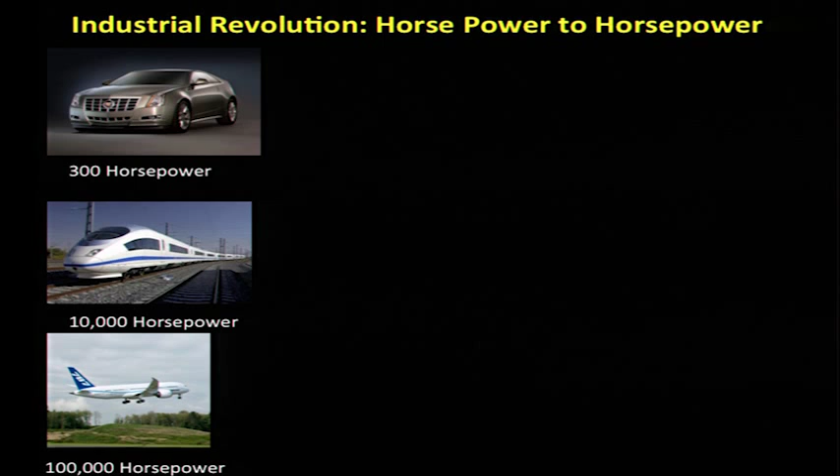And human history is about 10,000 odd years old, a little bit more. And in that 10,000 years, the last 250 years is when all of this happened. And we light our homes not by whale oil anymore, but by a grid. And if you look at this world today, I don't think Washington and Jefferson could have imagined this lifestyle that we have today. And so obviously this has changed the world in many ways.

It has increased our productivity. It has increased our prosperity. And that has been an exponential increase. And it's measured, in this case, by global per capita GDP. This is global now. And you could have multiple measures, but this is one. And that has increased exponentially, and so has our energy use. And if you look at this, almost all of it, 80% of this has been fossil energy.

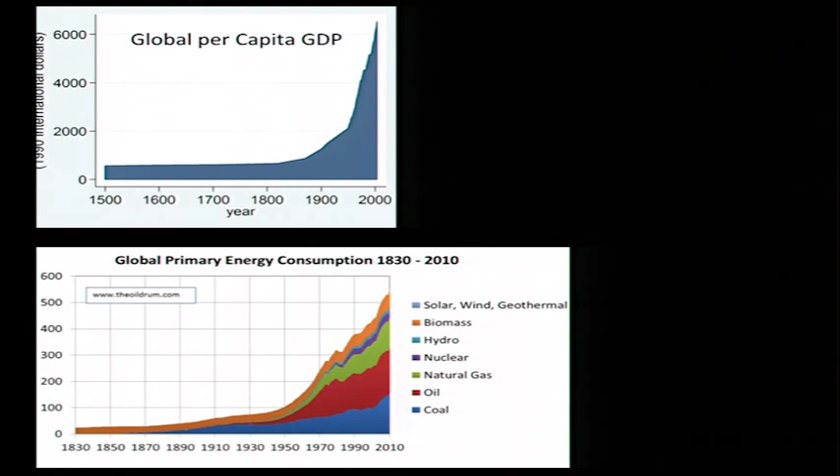And so the Industrial Revolution is all about energy. How we source energy, how we distribute energy, how we use energy. That's what it's been. There are a few other exponential increases that happen. The world population went from 700 million people in the beginning of the Industrial Revolution to 7 billion. So 10x. And that's a factor not just of the Industrial Revolution, but of things like the Haber-Bosch process that made artificial fertilizers that helped save the world from starvation and famine and grew food for all of us.

And so this is now the world that we live in. We have 7 billion people. By 2050, the estimates are 9 billion. And by 2100, 10 billion, plus minus an error bar. And that number really depends on the fertility of women in Africa. That's what it depends on. And so this is the world we're going to encounter in the future. Our children, grandchildren are going to encounter.

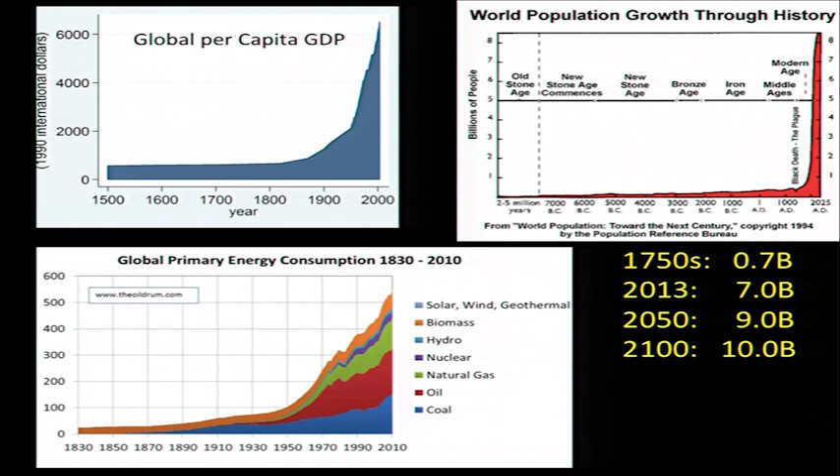And people talk about peak oil. There's really no peak. And that is because the technology for discovery and extraction gets better and better, gets cheaper, and it keeps pace. And in fact, not only keeps pace with the demand, it exceeds the demand. So sometimes you find the capacity is built out and the price comes down. But there seems to be enough fossil fuel out there. In fact, right now, we are all excited about US shale. We haven't even touched methane hydrates, and there's a lot more out there. So it's fair to say we have a lot of fossil fuels.

But if we are to extend this world, there are a few things we should be aware of that we are encountering today. And that is the global price of oil. One of the amusing things we had to encounter in Washington is that everyone blamed the president for the price of oil. The president does not control it. In fact, we had to put up a nice face in hearings and all that, saying that we're really sorry the price of oil is low. We had no control over it, neither did Congress. Neither does Congress.

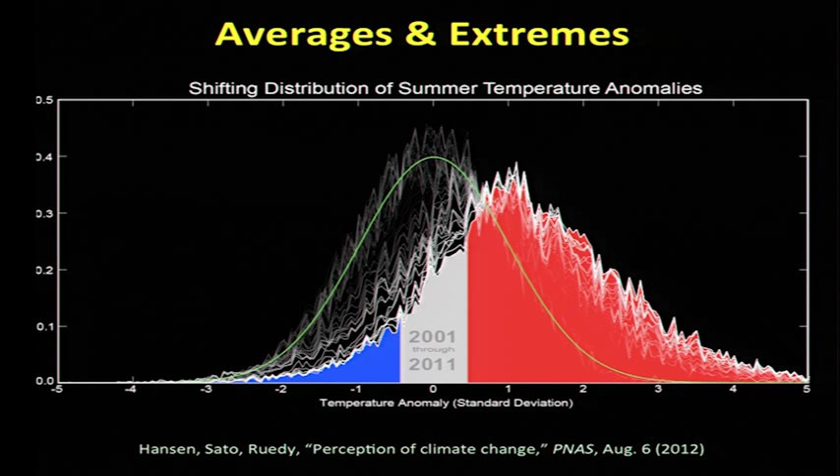But now I'm going to play the movie for you as to how this distribution, this is data now, of the 1960s and 70s. You can see this is fluctuating, but it's about the Gaussian, and see what happens. So clearly the average has moved, but that is just a small slice of the whole story, because what you're finding is that this distribution is broadened. There's clearly a direction for this distribution to move.

It is not moving on the other side, but the tails of the distribution, which have a nonlinear effect on our life, on our economy, are certainly there, and you're reaching 4 to 5 sigmas at probabilities that were unheard of in the past. And it is this tail which is really worrisome.

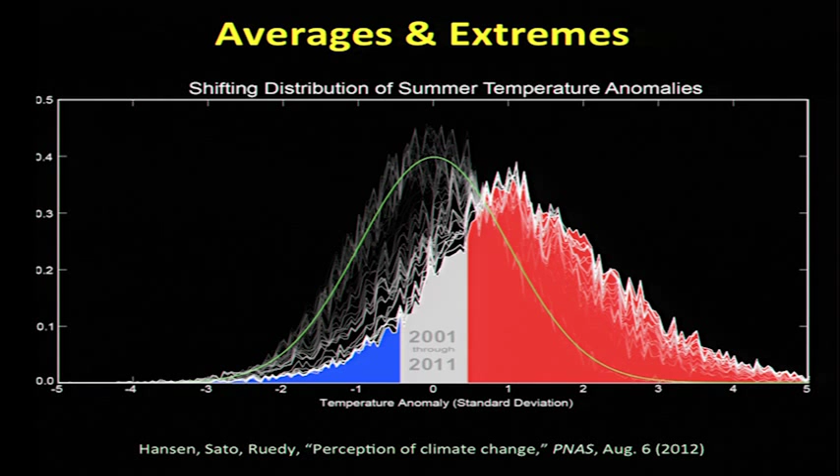So last summer you had a heat wave in the Midwest, which was almost as bad or worse in certain cases than the Dust Bowl of the 1930s, which led to a lot of folk music and all that, right? And last year, it really affected our agriculture and our livestock, et cetera. A few years ago, we had this heat wave in Moscow and Russia, which killed about 70,000 people. Before that, it was in Europe.

So if you really look at the geographical map, I'm not presenting it here, but there's a geographical map. And what you find is these heat waves, the hot spots, are moving around the world, just like a bubble in a carpet. We don't know where it's going to happen next. And so with climate change, there's a lot of science needed to figure out where it's going to happen next so we can plan for it. But certainly this is happening, and the hot spots are going around. So this is a real issue.

So now if you ask the questions, you've got economic security, you've got balance of payment, now you've got an environmental aspect of it.

So let's go back to the beginning of the Industrial Revolution and ask the question, how much CO2 have we emitted since the beginning of the Industrial Revolution, which has given this 0.8 degrees rise? So what's the cumulative CO2 emissions since the beginning of the Industrial Revolution? And this just came out in an IPCC report, and I'm going to put some rough numbers out there, approximate numbers. And it's about 1 trillion tons of CO2.

And the life of the CO2 molecule in the atmosphere is more than 100 years. In fact, most of the CO2 molecules are still there. Some of it is absorbed in the oceans. But nevertheless, it's still there. It's like a big capacitor, and it's integrating over time. So this is 1 trillion tons in 250 years.

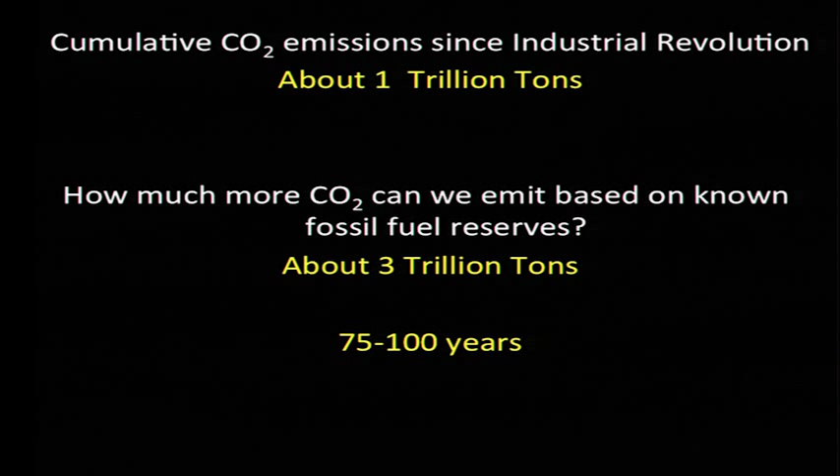And then you ask the question, these 3 trillion tons of CO2 in terms of fossil fuel, how much is it worth? What's the dollar value? And the number is tens of trillions of dollars. People are estimating $28, $30 trillion, but it's a huge number.

So society is given the choice. The choice is as follows. Should we keep those 30 trillion or tens of trillions of dollars in the ground and not use it for economic growth and save the environment? Or should we take those tens of trillions of dollars, continue on the exponential growth of our economy, and to hell with the environment? And that is the choice given, and that is a false choice.

Because what people don't account for is the ability for the human mind to innovate when there is a need. And this is best articulated by the former oil minister of Saudi Arabia when he said, "The Stone Age did not end because we ran out of stones." It's because we transitioned to better solutions, which is why you are needed, which is why research is needed, which is what Steve Chu and I wrote in our paper that came out in Nature last year. It's really calling for a new industrial revolution.

If the old industrial revolution was all about using fossil fuel, it's all about energy, but it was based on fossil fuel. Could we have a new industrial revolution which really accounts for all the 3 securities, the economic security, national security, as well as the environmental security?

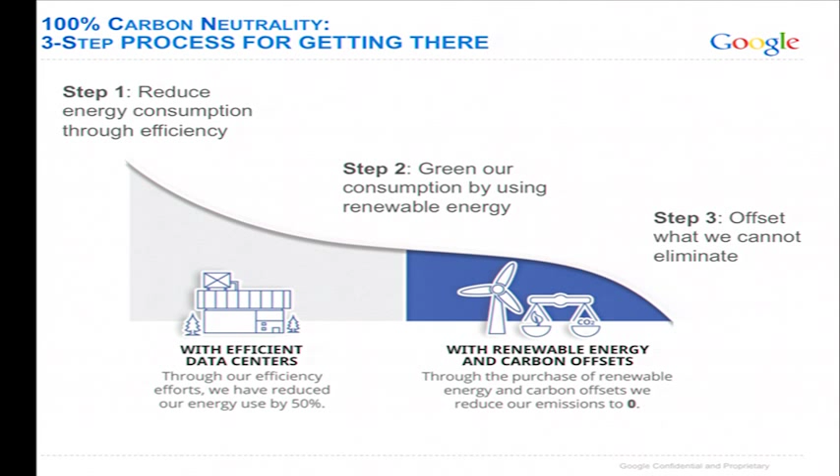In the energy business, the things that really matter is a technology that scales in volume over time and scales down in cost. If the cost does not come down, and if a technology doesn't scale, it doesn't matter. So the best way to present it is using what are called learning curves, experience curves in economics.

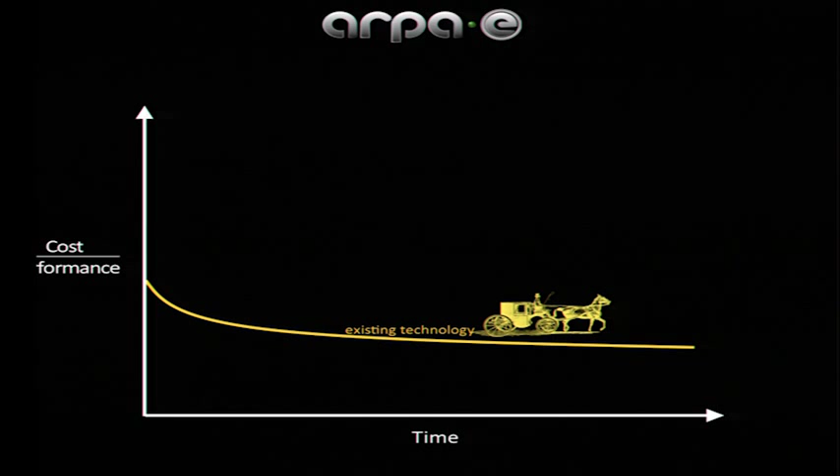So any technology, in this case, you have an existing technology, I'm going back to the early 1900s, which is a horse carriage, in this case, for transportation. And that's an existing technology, and that improved over time. And in the beginning of the 20th century, this was the technology of use. And you can improve this technology. You can make better bearings, you can make better wheels, you can get stronger horses. And you can improve this.

And what happened at that time was some wild and crazy ideas to be transformational and disruptive to this technology. And that was automobiles. There were many ideas, steam-powered vehicles and the Benz Motorwagen. And there were multiple shots at goal to be transformative, and only one of them succeeded. In this case, well, there are many, but one of them really succeeded. That was a Model T.

And Model T, all of these were transformational, potentially. But one of them became disruptive because it was cheaper, it was faster, and frankly, it was cleaner because people didn't have to clean up all the horse poop on the roads, which was a big environmental issue in cities like New York. So it was cleaner, it was faster, and it was cheaper. And so this is what transformative and disruptive could do.

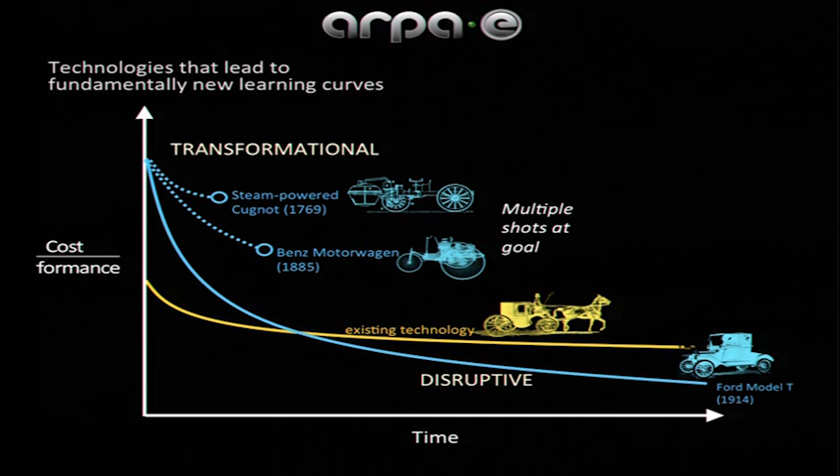It creates entirely new learning curves in the whole business of energy, and eventually the existing technologies become obsolete. And that is really the role of ARPA-E, to take multiple shots at goal, to be transformative and initially may seem crazy, but one of them may succeed. But bring it to the energy business to address the three securities, as well as to provide the US with a technological lead, because if we don't do it, someone else will. And so that was the whole idea.

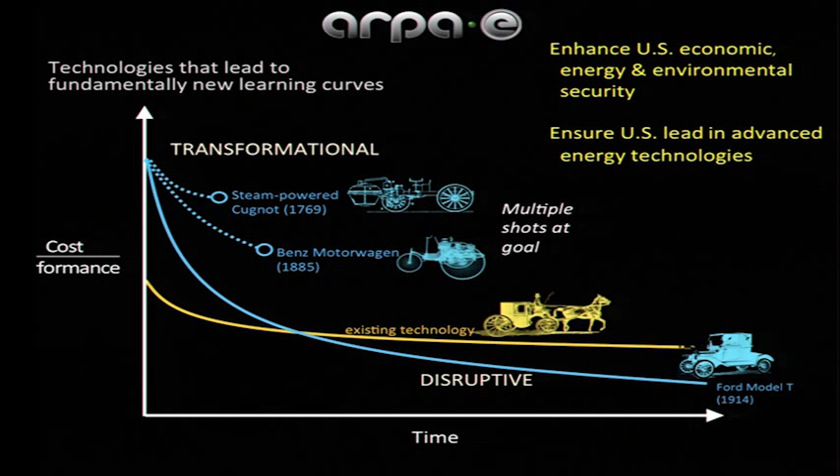So I'm going to talk about a few examples of this, but it's best to say that in the context of our energy system. And the energy system is really two different systems. One is the stationary system, which is the electricity generation, electricity transmission and distribution and end use, and natural gas to our home. This is the stationary power system.

And the other is a transportation system, which is mostly petroleum, gasoline and diesel, and used in cars and trucks, et cetera. And these two systems really don't talk to each other, except more recently because of electric vehicles, but that's a very small percentage of our transportation system. So first I'm going to talk about the stationary system.

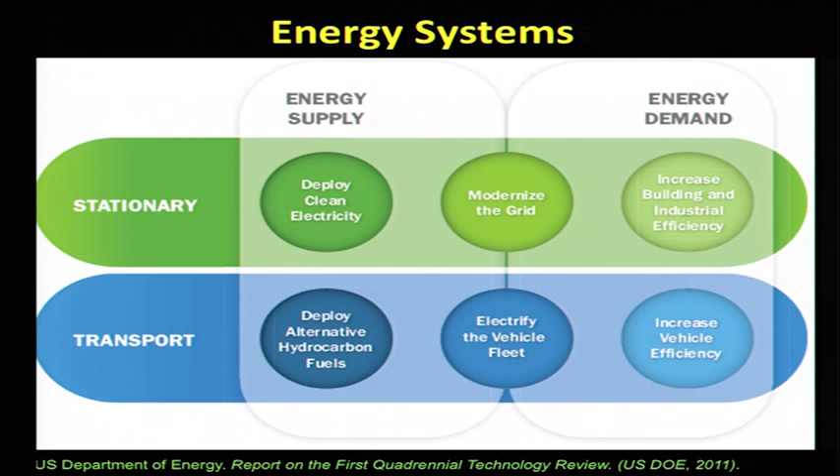And what has happened in this case is, over the last 5 to 7 years, there has been a disruption that I just talked about. And it's taken the existing learning curve and just become better and cheaper. And that is the use of shale gas, the natural gas. So I'll just say very briefly about what that is all about. This is how shale gas is produced.

It started in the 1980s in the Department of Energy, and most people thought it was a crazy idea: to go deep, about 7,000 feet, to the shale formation out there and drill horizontally and use hydraulic fracturing to fracture the rock, because these are highly impermeable, and so you want to increase the permeability.

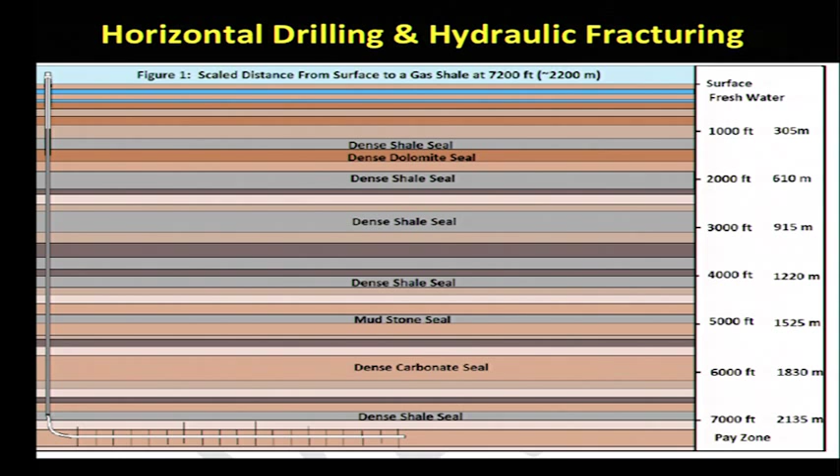Again, shale was ignored by most geologists and geophysicists because they just had to drill through it to get to the sandstone to get oil and gas. And so everyone ignored it, except for a few crazy guys who said, okay, let's go for it. And to their credit, DOE supported that. So now, over the last 7 years or so, this became economical to produce gas at scale. And so that's why this shale gas revolution, but it took about 25 years or so to get there.

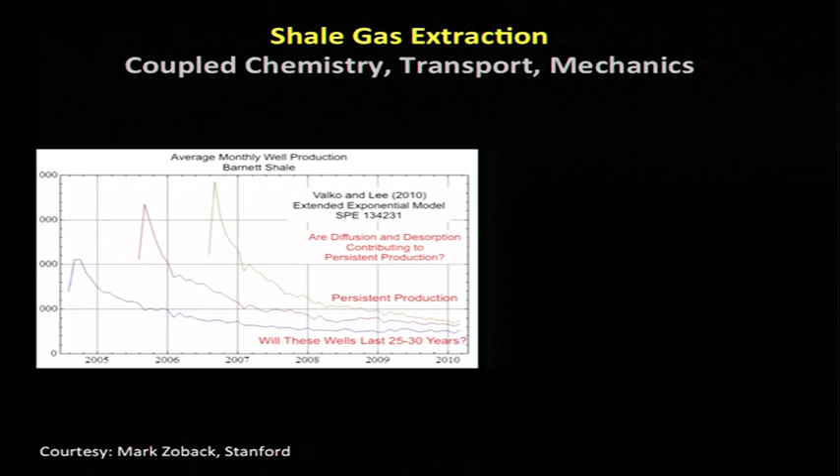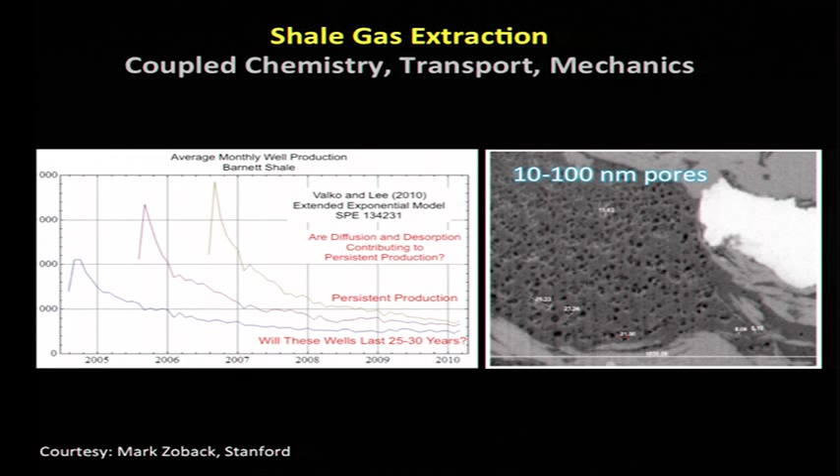Okay, so we know how it works. But the permeability of the pore, which depends on the square of the size, really depends on the pore pressure. So you've got the permeability depending on the mechanics of this material. So there's a coupling between the chemistry, which is the physisorption of these gas molecules on the surface, and the transport and the mechanics. Now, it turns out that in the oil and gas industry, the computational models used to model this are missing that coupling today. So there's some real work that is required here.

And because the size is 10 to 100 nanometers, the flow is not viscous, and many times is Knudsen flow. And because of Knudsen flow, and we don't know when that transition happens, we really do not fully capture the science of the fluid mechanics and the solid mechanics, as well as the chemistry, coupled together. So this is a real problem, and I hope the scientists and engineers really get into it.

Because not all shales are equal. The Marcellus shale and the Barnett shale, we can put pressure with water, you can fracture it. But there's Floyd shale in Alabama that we cannot fracture because the clay content is too high. And, as some of you know, clay is a two-dimensional material. You try to fracture it with water, and it just slides. It's viscoplastic. So there's a lot of work still remaining to be done to understand shale.

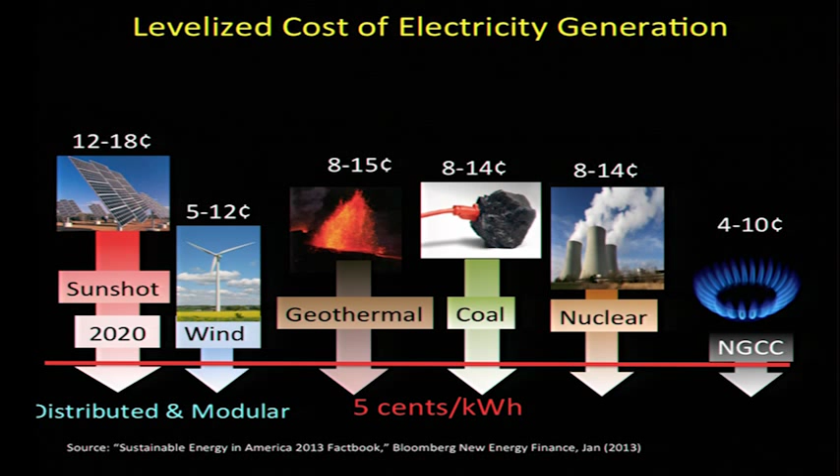So I'm going to say a little bit about that, but there's a big difference between these kinds of generation. These are all centralized generation, which is amenable to the grid of today. But these are distributed and modular, and the grid has to adapt to it, and I'll come to that in a few minutes.

But there are some things in here that are worrisome in terms of technology. And it's not so much the wind turbine, but the mechanical energy to electricity conversion, and that is done by generators, which use large magnets. And these magnets, permanent magnets, are based on rare earths. These are iron boron magnets which use neodymium and dysprosium. Neodymium to create the crystalline anisotropy to create the strong magnets.

And rare earths, 90%, 95% of those are sourced from China. And we have a supply risk because there's internal demand in China, and they might actually like to use it. So there was a lot of effort in looking at rare earth, and there's a whole energy innovation hub on that.

But before that happened in ARPA-E, we said maybe we should look at that and see if there are other technologies. And it turns out if you go back to the 70s and early 80s, there was a lot of research done on magnets before neodymium-based iron boron magnets came around. And those were ignored because neodymium-based iron boron became the magnet of choice. And so this is one type of material. I'm sorry, it's getting cut off.

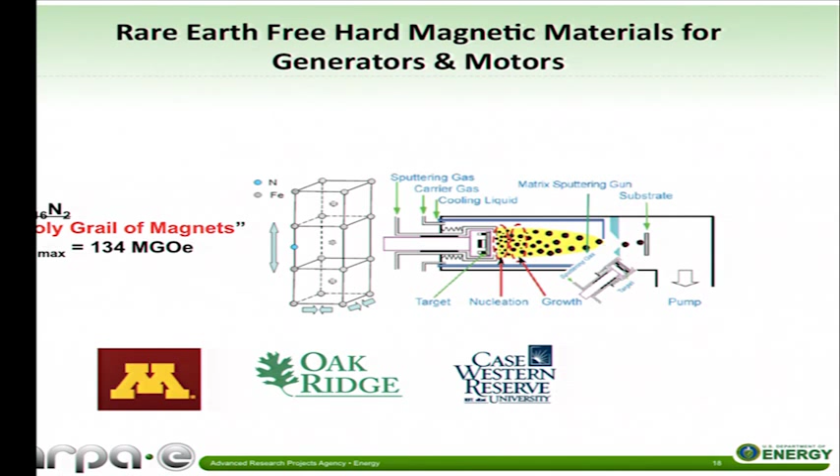So most of the cost today for solar is really not in the panel, but in what is called the balance of system. This is the installation, the permitting, the whole process. There's a technology aspect as well, but it's a technology plus process aspect. In Germany, the balance of system cost is much lower. This includes, by the way, power electronics as well.

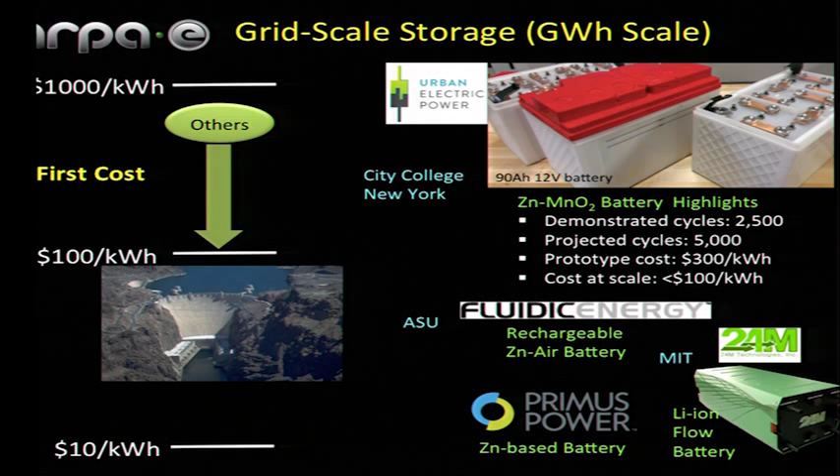Because the molarity of lithium in these electrodes is 24 molar, and that's why 24M. And Primus Power looking at zinc-based battery. So they're all competing, and there are many more out there. They're all competing. And they all have to understand the science of what's going on in these electrodes, what the electrolytes are like. And there's a lot of science and engineering still remaining. And I'm hoping, and I understand, the hub is going to help them to really understand and reduce the cost and improve the performance even more.

But these batteries are required for grid integration. It's really important to understand what the grid is all about. Now, the grid started in the United States. It is called the greatest engineering achievement of the 20th century by the National Academy of Engineering. But if you step back for a moment, it was the 20th century. And if you look at the architecture today of the grid and the paradigm, the architecture really goes back to Tesla and Edison. The architecture has not changed.

And the paradigm is the following. You've got centralized generation of electricity. Why centralized? Because it is cheaper. The economies of scale for thermal power plants and hydropower plants. And these are typically away from population centers, so you need high voltage transmission over long distance, and then you go to the local substation where you have a distribution network and feeder lines into neighborhoods at 13 kilovolts, and then you tap into it at 240 volts, and you use 120 of those. That's been the architecture, and that has not changed.

And in this architecture we have $1 trillion of assets, and those assets are aging. And just to give you a number, we lose roughly $100 billion a year to power outages. The average is 1.5 to 2 hours per year. That may seem small, but the tails of the distribution kill you. For example, in Superstorm Sandy, 600,000 people lost electricity immediately, and after 2 weeks, roughly 50,000 people still did not have electricity. And if you really go and find out what happened, the distribution network really got messed up.

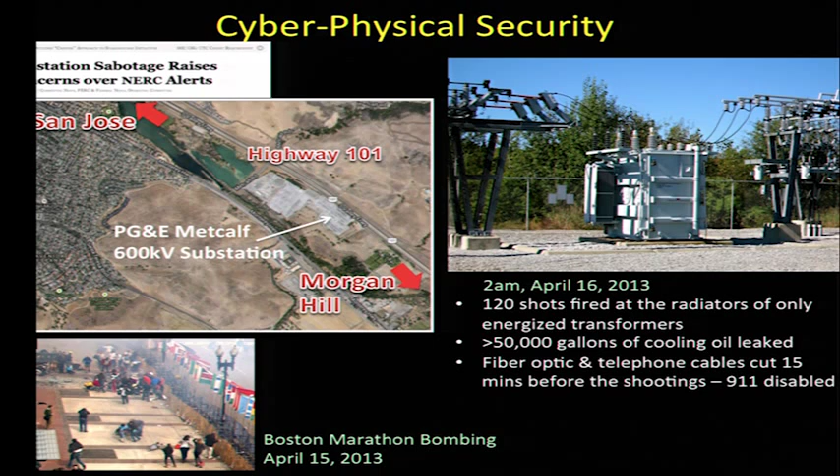So what have we done so far? We talked about smart grid, et cetera. So what is this? Because it means a lot of things to a lot of people. So far, what has happened is that we put in a measurement infrastructure. In the transmission network, these are called phasor measurement units. We have about 1,000 of them, which measure the current, the voltage, the phase angle, the frequency, and which are time-stamped as well as geographically stamped with GPS, and the data is provided every 30 milliseconds. So we have all this data coming out, and we are getting petascales of data.

Okay, this is a big data problem. And we really have not figured out what to do with it. And this is on the transmission network, and on the distribution network at the end use, we have not all, but some smart meters that are giving us data in an automated way. And the utilities are trying to figure out what to do with it. So we are at a very early stage of this whole smart grid thing, because how to extract useful information out of this petascale data is yet to be done.

What is useful information? Well, we definitely want to understand situational awareness, real time. If some line is getting congested, instead of using a pricing mechanism to reduce the congestion, how about routing the power? We don't have routers today. So in ARPA-E, we created a program to create routers and to be able to optimize the power flow. And that's happening right now. And how about doing some real-time markets? Because most of the electricity that is coming here today was planned out yesterday. So it's a day-ahead market and day-ahead planning.

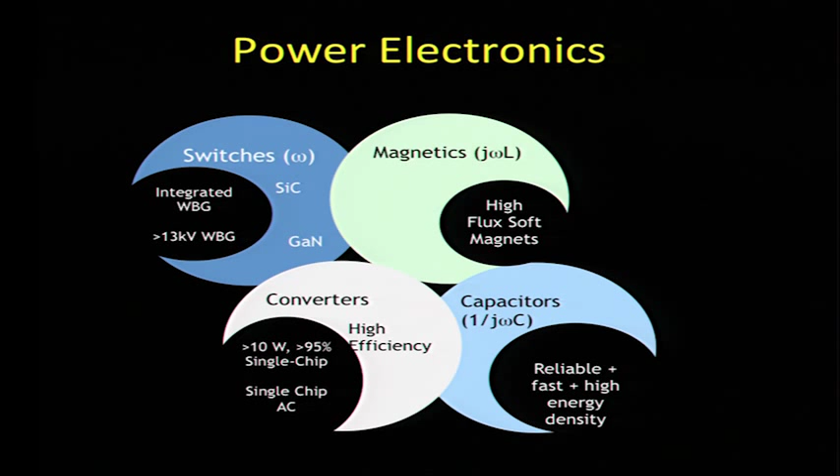And there's a lot of things that happen. I'm going to give you just one example amongst many on the solid-state transformer, the electronic transformer. This is what the technology is there today. This is about 1 megawatt in a distribution substation transformer. This is about 8,000 pounds. You need a crane to install. It operates at 60 hertz. This is almost the same technology that Tesla had.

And the average age of these transformers in the United States is 42 years. And the expected lifespan is 40 years. So we're living on borrowed time. There's a backlog of these transformers. These are the same ones that were shot at. The backlog of the transformers is anywhere from 6 to 24 months. I get different numbers from utilities, but 6 to 24 months.

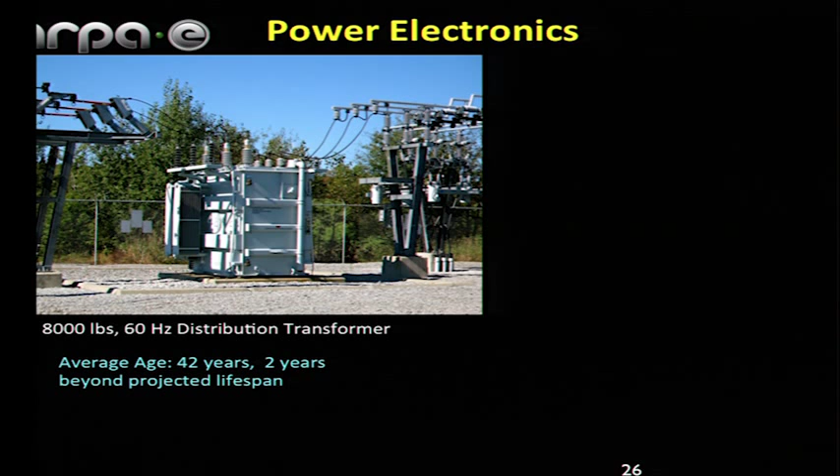And so people are stockpiling now. We don't just have nuclear stockpiles, we have transformer stockpiles. Because people are stockpiling, because if something goes wrong, we need them. So this is the state of today. So we said that maybe we could change that in a certain way, and I'll give you one example of

this electronic form, and this is the company called Cree, which is making silicon carbide-based transistors, and this came out of an ARPA-E project, where a single transistor could drop 15 kilovolts of voltage across a 200 micron thick layer of silicon carbide. So the material quality has to be really good. You can't have dislocations and resistance, because then you have latch up in these transistors. And it can handle 100 amps.

So 1.5 megawatts of power being switched at 50 kilohertz going through a fingertip. That's equivalent to 200 homes. Now, this is the heart of this system. Now, you take these transistors, put them in bridge circuits, whether you have 4 of them or 6 of them, depending on the number of phases, and you have these LC filters, and now you have power conversion that can

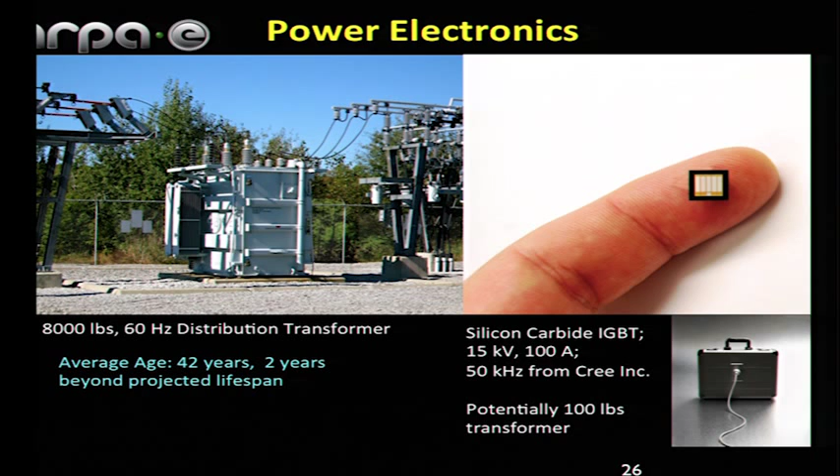happen. And if it operates at 50 kilohertz, the weight of the transformer could potentially be 100 pounds, and it becomes smarter. So that's the technology. No one has really built a transformer electronically yet, and that's what's going on right now. And this is just the silicon carbide. There's a whole gallium nitride thing that's going on as well. But it's important that there's some materials issues out here, not just in the switching material.

By the way, we have the 3 largest manufacturers of silicon carbide in the world, right here in the United States. So this is a strategic move that we had to make. So let's go for these wide bandgap semiconductors like silicon carbide. The material aspects really come in the magnets. So as you go up in frequency, as many of you know, the losses go up, because the losses come from 2 means: your domain walls moving in the magnets, as well as the eddy current losses. And as you go up in frequency, losses go up, and we really don't understand the trends very well.

We don't understand soft magnets, because the federal government never invested in soft magnets. They invested in hard magnets because of data storage. But soft magnets are critically important for power conversion. So how do we make magnets which are soft, with a very low hysteresis, and that can also be done at cost? Maybe some nanoparticle-based, and there's a lot of work going on in this, laminates and nanoparticle-based that are insulated so the eddy current goes down, and single domain particles. And so a lot of work is needed out here to integrate these with the switches and make power conversion circuits. This is where the bottleneck is today.

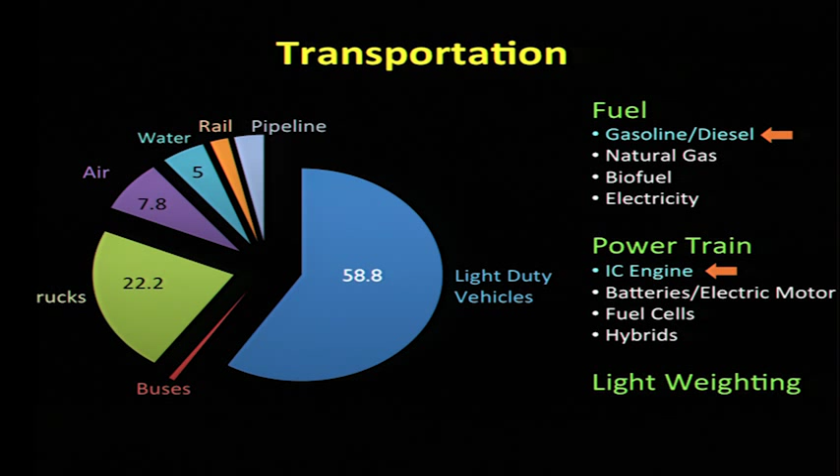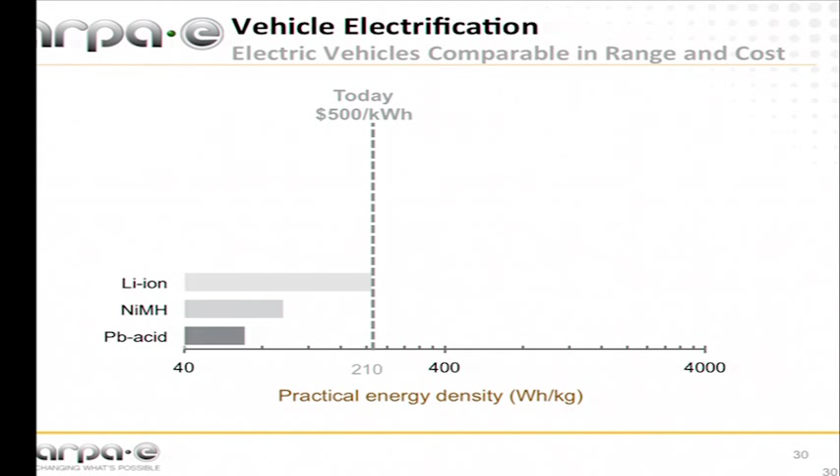This is lithium-ion in terms of practical energy densities. This is out here, and the cost is roughly $500 a usable kilowatt hour. And at ARPA-E, we said that maybe we should focus on beyond lithium-ion, and some of these ideas came around in discussion with the Argonne folks. And so the target was $250 a kilowatt hour and beyond lithium-ion.

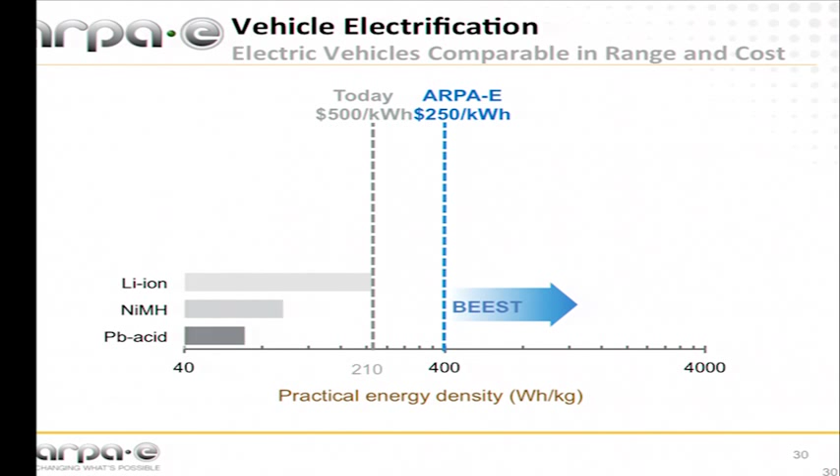This is a program called BEEST that Dave Danielson, who is now currently in EERE as Assistant Secretary, created. And these are various technologies, whether it's rechargeable zinc air, magnesium ion, advanced lithium ion, as well as lithium sulfur and lithium air. It's not that we started this, these have been tried out before, but there are some fundamental science issues that still remain to be solved to make them usable in a way that is actually economical. And there's a lot of research still to be done, and I'm hoping that the hub will address them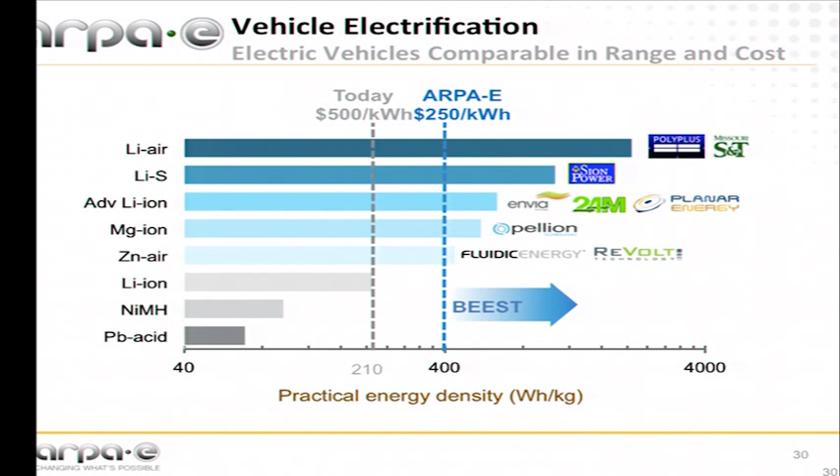as well. Just to give you one area where research remains to be done is something that you all are very familiar with. That is the technology that Envia is developing, where this cathode material really was developed out here. These are the layered compounds of manganese-based cathode material. And while there's a lot of work that is still going on, Envia decided to add some silicon anodes. And silicon, as many of you know, has some challenges. When lithium goes out, it really distorts the whole lattice and makes it amorphous. So there's a mechanical aspect to this.

There are a lot of side reactions that happen in silicon with the electrolyte that we still don't understand. We haven't quite focused on the electrolytes. There's a lot of research still remaining to be done. I'm highlighting this because a lot of people think that, oh, it reached 400 watt-hours per kilogram at 80% depth of discharge, roughly the cost of this, and it's a done deal. It's not. There's a lot of work still to be done to make it compatible, usable in an actual application, and that needs research.

Sunlight to fuels, there's a lot of work that has already gone on, and I'll just touch upon this very briefly. You see, most of the biofuel research that has been done is either using cellulosic biofuels or corn or sugarcane or algae. These are all what I call photosynthetic biofuels. And these are based on the Calvin-Benson cycle in biology to fix carbon dioxide. By its very nature, this Calvin-Benson cycle, I'm sorry it's getting cut off out here, is less than 1% efficient because some of the enzymes in this cycle are corrupted by oxygen as the temperature goes up. The efficiency is really low. It works. It's a great thing. We all rely on photosynthesis, but it's inefficient. And now research is needed.

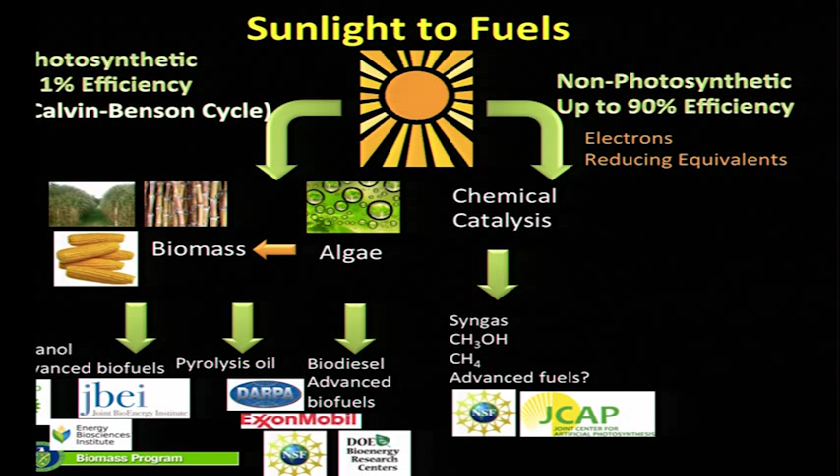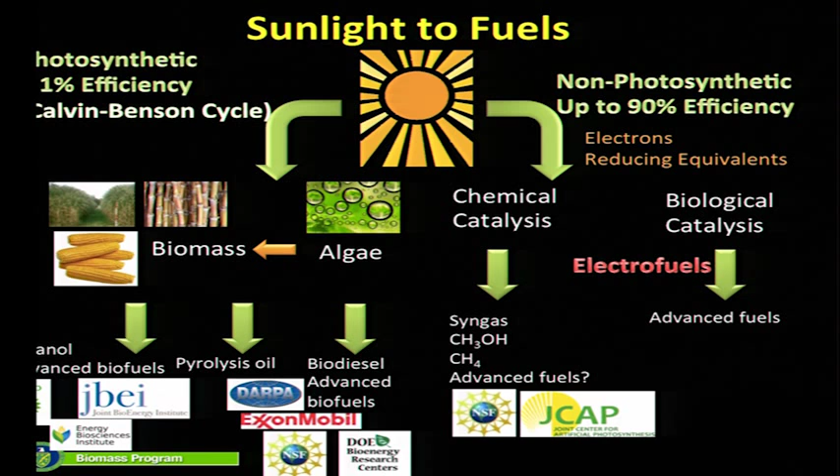Or what JCAP is trying, which is an energy innovation hub on artificial photosynthesis, to really understand the science of photosynthesis, which we still don't understand, to be able to split water and make methanol and other carbon-based fuels. There's another one that had not been tried before, which we said was worth trying, which is the biological catalysis that led to the program called Electrofuels. And the idea is to really generalize the idea of photosynthesis, but not just rely on photons and not rely on the Calvin-Benson cycle, to use non-photosynthetic microbes and feed them various other reducing equivalents, like hydrogen sulfide, hydrogen, directly electrons, ammonia, and oxidation of iron from +2 to +3 state.

And there are a lot of microbes in the deep ocean vents that don't have sunlight that oxidize iron or use hydrogen sulfide to make carbon-carbon bonds. And no one had ever used them. And so the idea was to use these non-photosynthetic microbes and their cycles. Well, Calvin-Benson is one of them, but there are many other cycles which are 10%, 20% more efficient than the Calvin-Benson cycle that had never been used. So we said, why don't we try that and generate some molecules, and if you can get to something called an acetyl-CoA molecule, then you can not only make oil and fuel, but you can also make bioproducts. And this was a crazy idea at that time because while we knew the genome of some of these organisms, we did not know how to manipulate their genomes. And people figured this out.

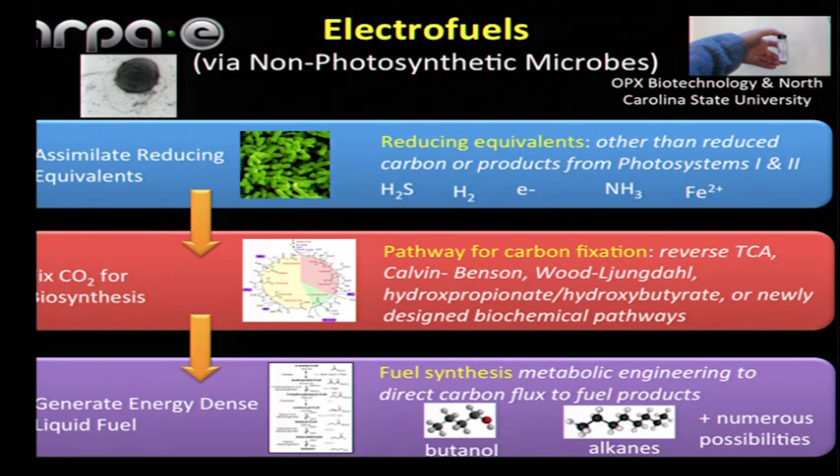And lo and behold, in 2 years, this was the first. Now this is a company, OPX, a startup company in North Carolina State, that made the first biofuel without using sunlight. They're using electrons directly to make oil out of this. And this was the first. Now we have 4 or 5 other groups that are making oil out of this, which is phenomenal. And this was 2 years ago, they made a little vial. Now they're making flasks, and I don't know which way this is going to go.

I'm going to share with you another example, which is kind of amusing. We created another program called Petro. So could we engineer plants to make oil directly? Forget about cellulose, this is oil directly, and at scale and at cost. And I'll give you one example. So we know that algae can make oil directly, but algae has other problems. The reactors are kind of expensive. It uses water, it gets infected, and all that.

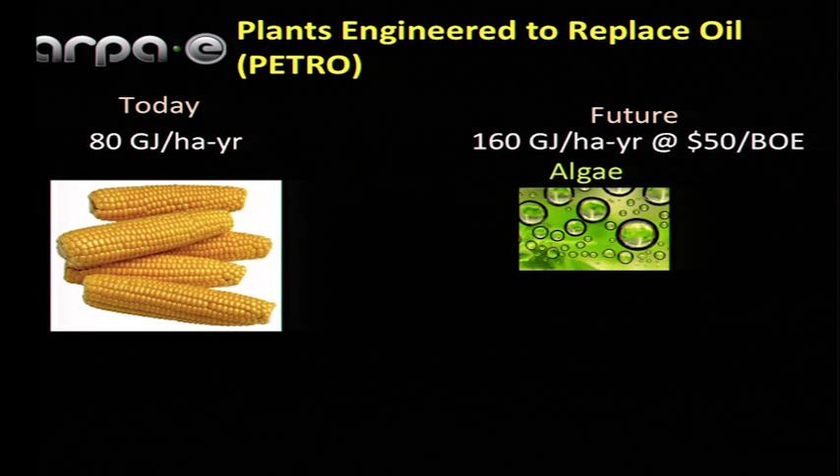So this group in Lawrence Berkeley Lab said, why don't we take the most useful part of algae, that is the metabolic pathway that makes oil, and insert that into a plant like tobacco, and we know the genome of tobacco really well. And so if you can insert it into tobacco, then the idea is that tobacco, which grows in bad soil, can make oil so that you would just squeeze these leaves and oil would come out. And I said, this is amazing, because if this is successful, you would have big oil and big tobacco come together and save the world. I mean, this is unbelievable, right?

And I never thought this would actually work, but we said, let's give it a shot. It's worth a try, because it doesn't violate any laws of nature. And what I heard, to my pleasant surprise, is this is actually working right now. And I don't know where this is going, but it always brings a laugh to everyone.